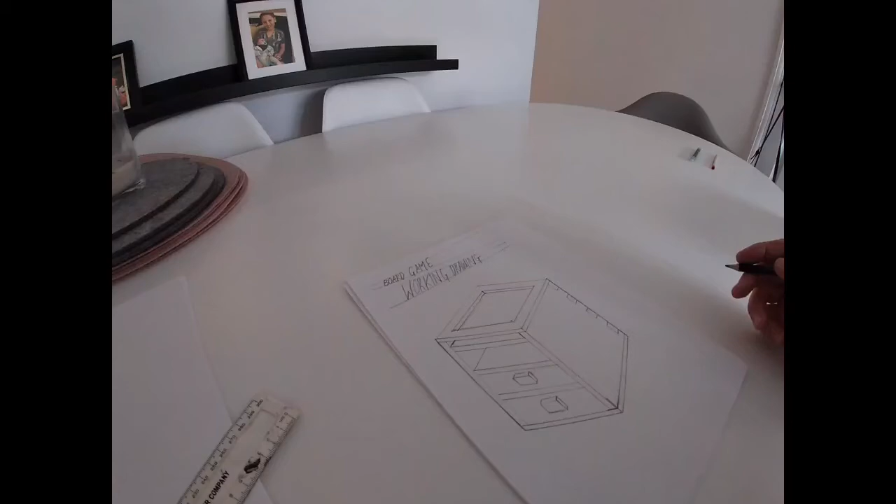We're going back to our board game working drawing. We started off last video by putting in a title, board game working drawing, then we drew out our main box for our board with a couple of drawers down here, and it's got a little slidey in section where the boards will go. So that was our working drawing finished.

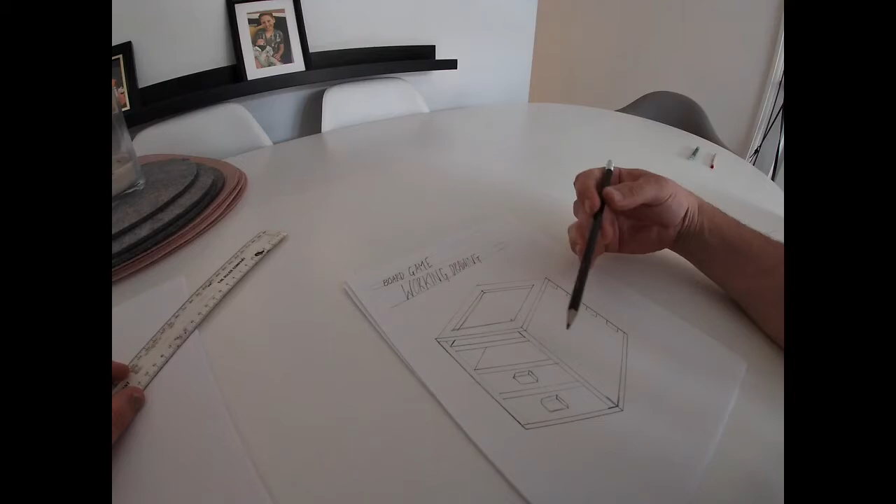What we're doing in this video is we're going to add all the detail you need on a working drawing so that a manufacturer can then go and make your product for you. We'll do this step by step, but it's important that you've watched the first video and completed this task before you can move on. If you haven't done this yet, go back to the first video on the YouTube channel, complete the drawing, and then you can get on with adding detail.

When adding detail, the first thing we do is put our dimensions around the outside of the box, because the manufacturer will need to know what size it is in order to make it. We do this by putting them around the outside, we don't draw on the actual box.

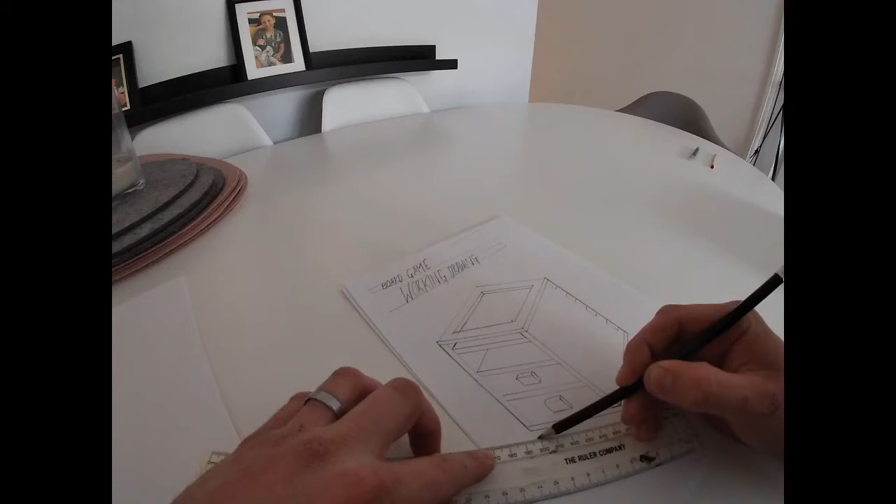So what we can do is start simply by drawing a line along this edge, and I'm going to put a small line here and here coming straight down. That tells me the width of this. What I'm then going to do is draw a line up here, parallel with this edge.

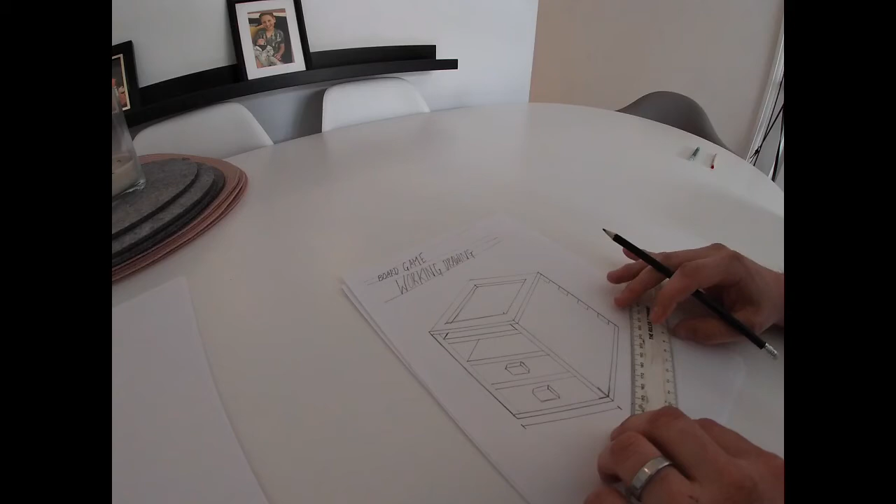Then I'm going to draw a line in like so, put a little line there. My next task is to do the height of the box, so a little line there and a little line there, and parallel with the edge, I draw a line in.

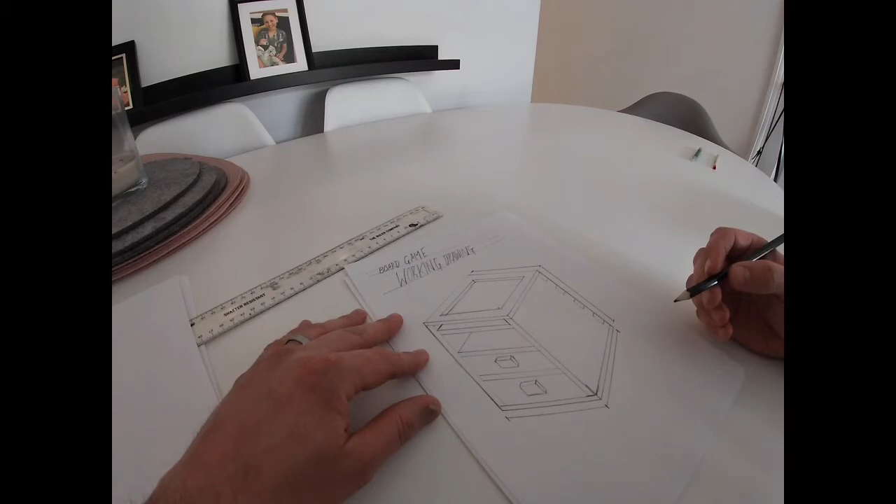And what I'm going to do is, because I want to show the width of this cutout here, I'm just going to put a little line up here and a line in there. Notice that all of my dimensions around the outside are not actually touching the edge of the box, so your dimensions shouldn't touch the drawing itself.

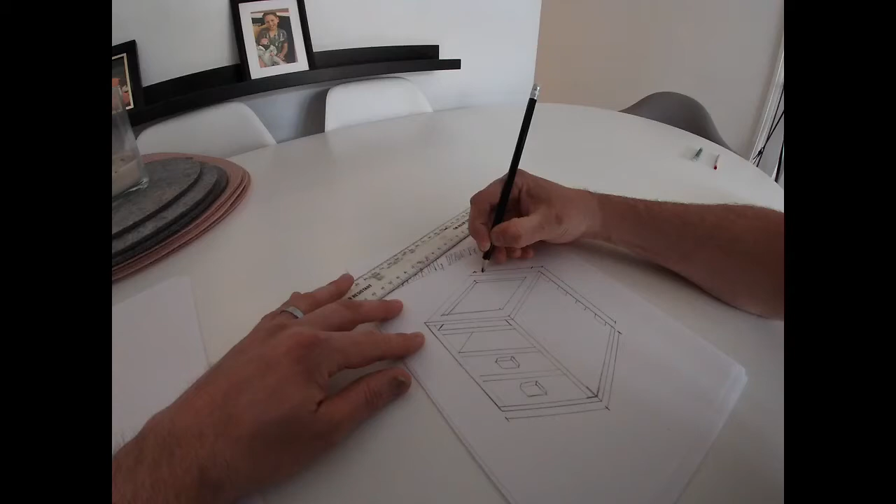I'm going to draw a little line in parallel with this edge, go up here, draw a little line in there like that, and do some little arrowheads in here, and in here, in here, and in here. What I'm also going to do is I want to show the width of the drawer.

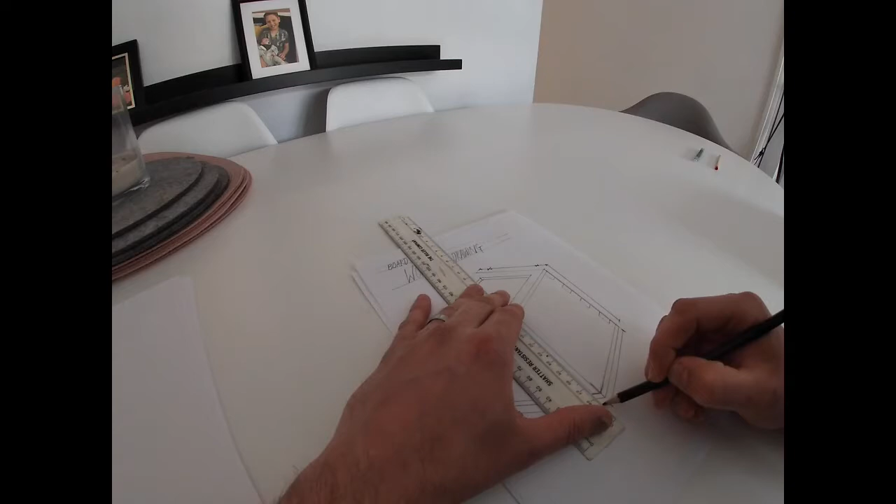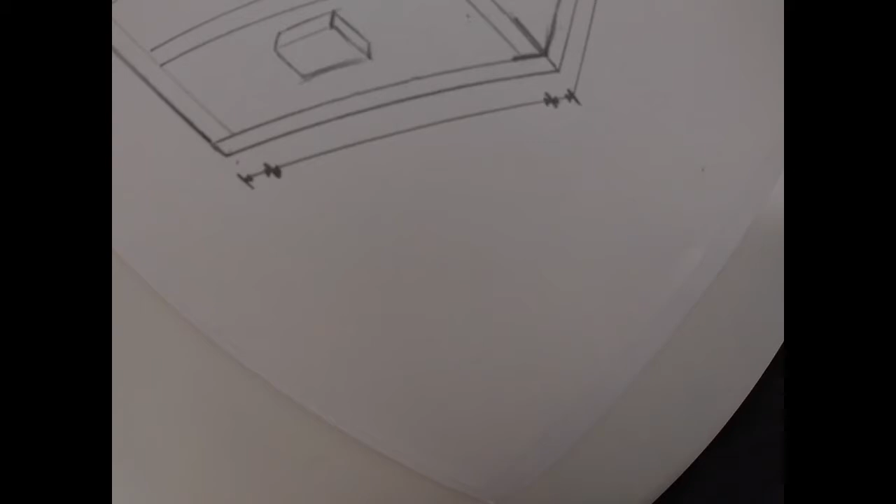So down the bottom here, I'm going to draw a little line like this, and these should also have little arrowheads, in the bottom, like that. Here we go, let me give you a close up. So we should have little arrowheads like this, and up the top here, little arrowheads like this.

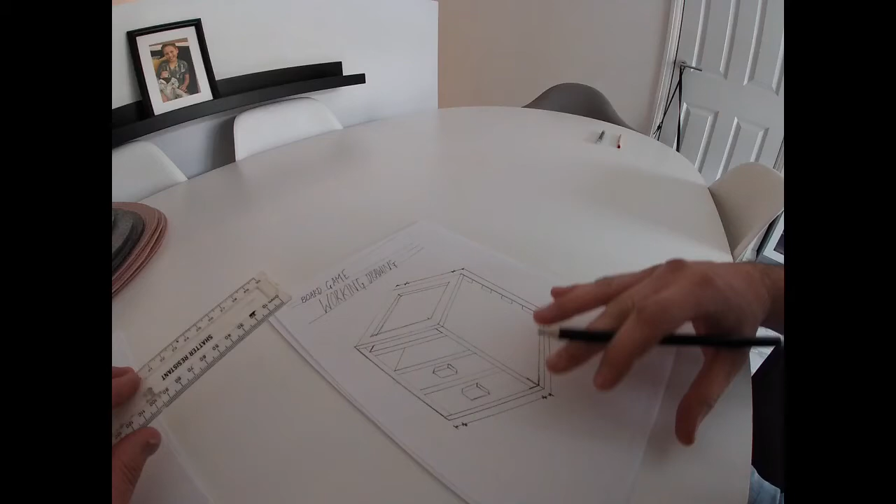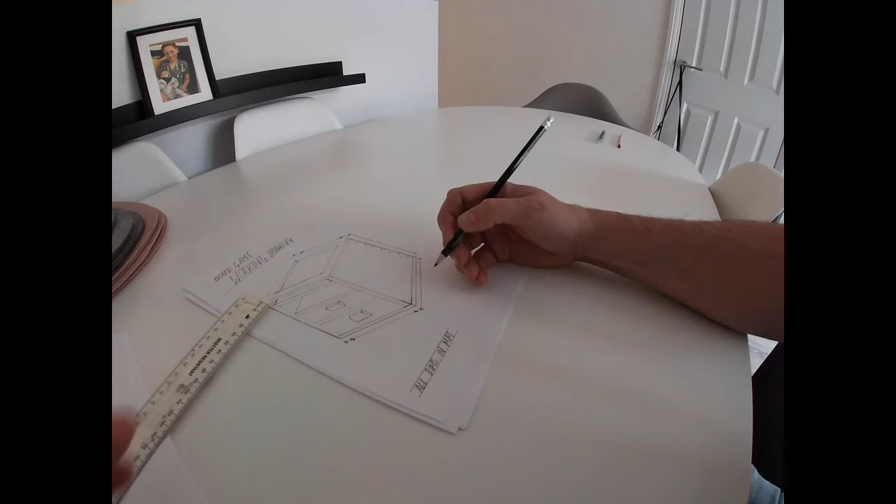Now all of our dimensions, whenever we're dimensioning something, it has to be in millimeters. So on here somewhere I need to tell people that. Down the bottom here, I'm going to put a couple of guidelines, and I'm going to write in capital letters: all dims in millimeters. Give you a little close up of that, how it should look, all dims in millimeters.

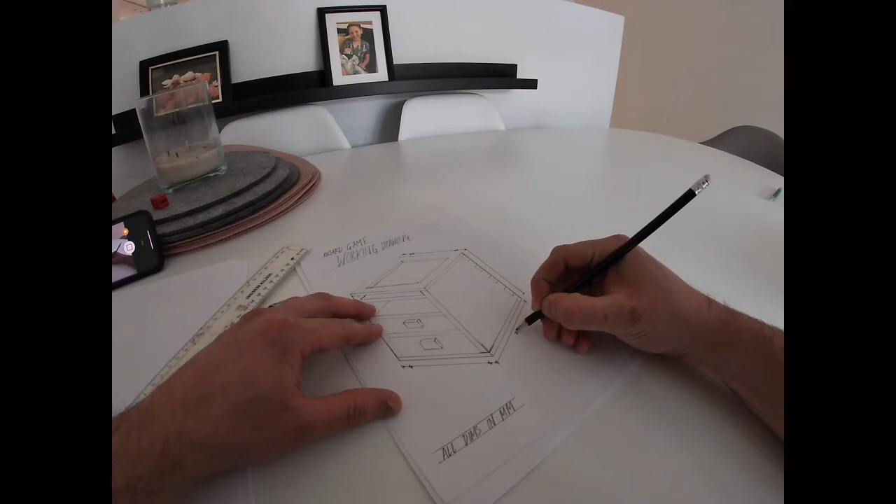Now what I can do, I know all of these are 220 millimeters. However, I'm going to write here on this one, 220, and on this one here, I'm also going to write 220. These are slightly different because I know that this is 20 millimeters and this is 20 millimeters, which we need to take off. So 20 in there, 20 in there. So this will be 180.

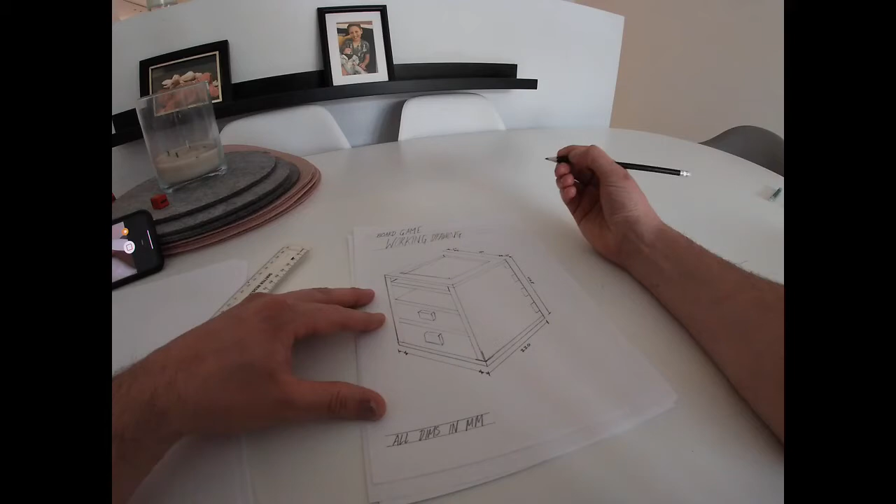And I know each of these at the bottom are 10, 10, and that should be 200. So there we have the dimensions.

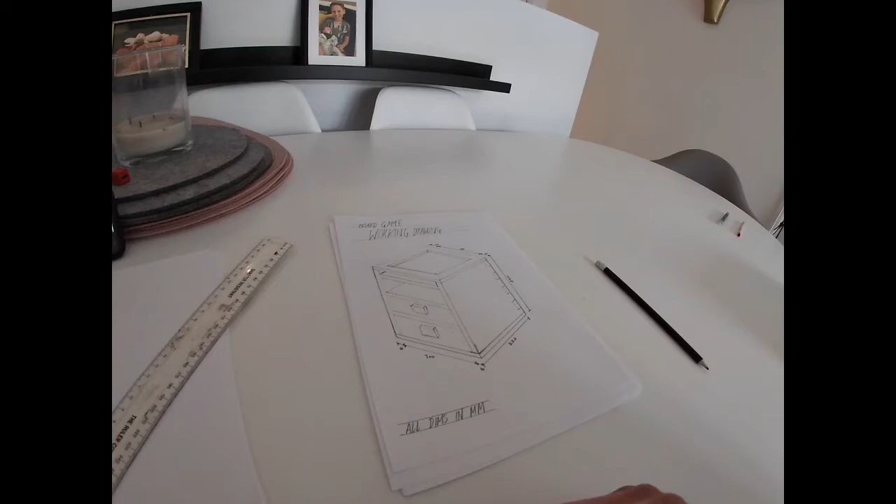There's 220, 220, and then up the top. That for now is my dimensioning done. You could add more dimensions on there, but that's not a problem.

The next thing I want to work on is something called a magnification. A magnification is where you zoom in on a certain part to show how something's constructed in more detail. So what you would do is, I'm going to do one down here.

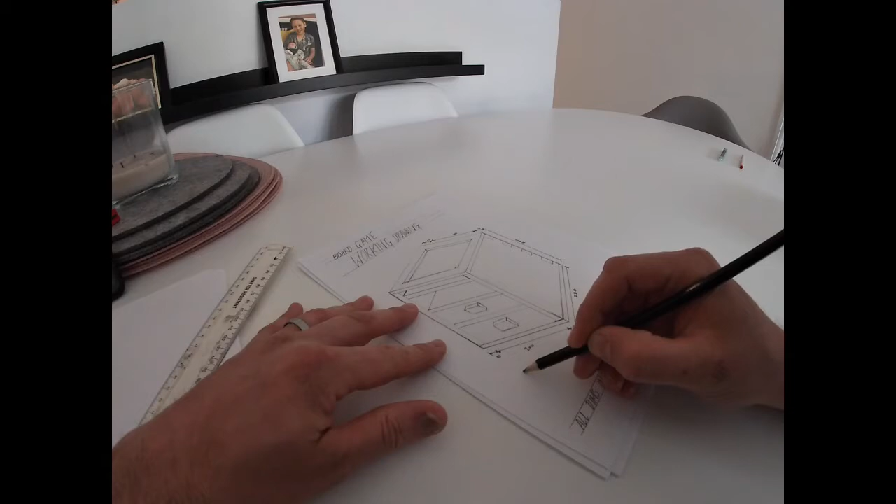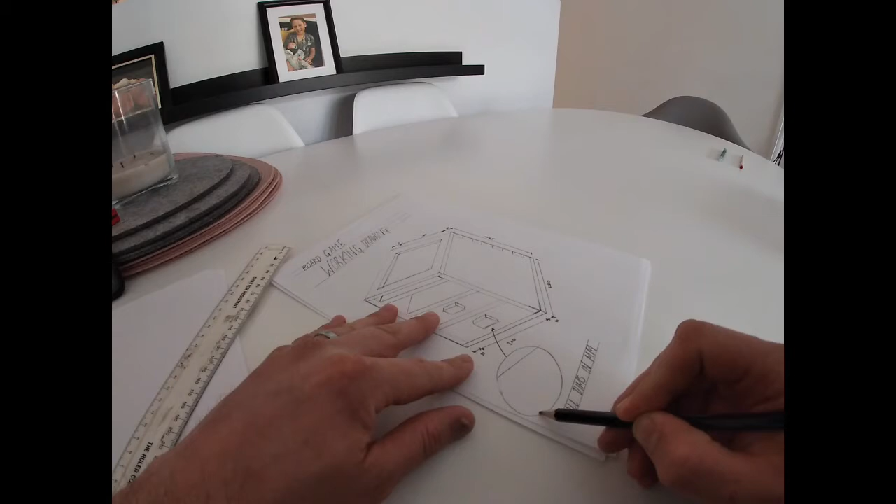Draw a little circle like this, get rid of that bit there. So I've got a bit of a circle, and I'm going to draw an arrow coming from that circle to the handle. All I want to do here is zoom in on that handle and just show the shape of it in a bit more detail.

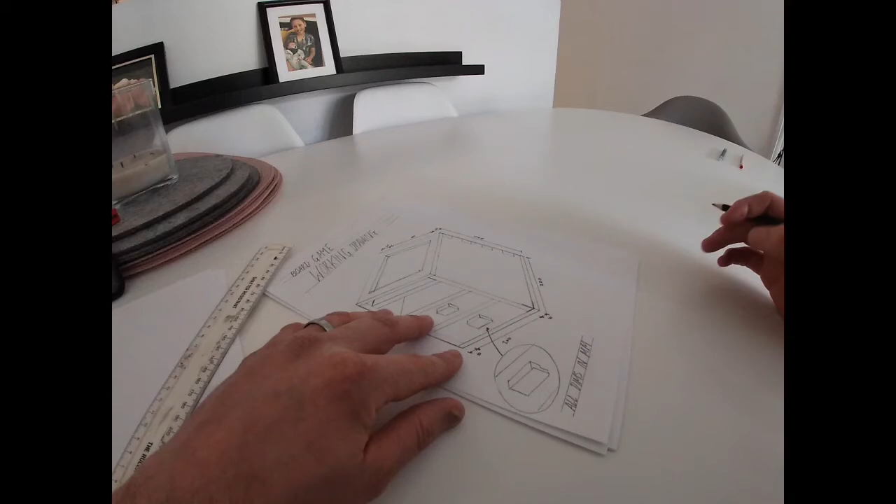Like that. Okay, and then next to it we'll just write in guidelines, handle. Right, let me give you a close up of that again so you can see what the detail is.

The next thing I'm going to show is up here. I'm just going to show the edge of the box zoomed in a bit, like so, and I'm going to draw like so.

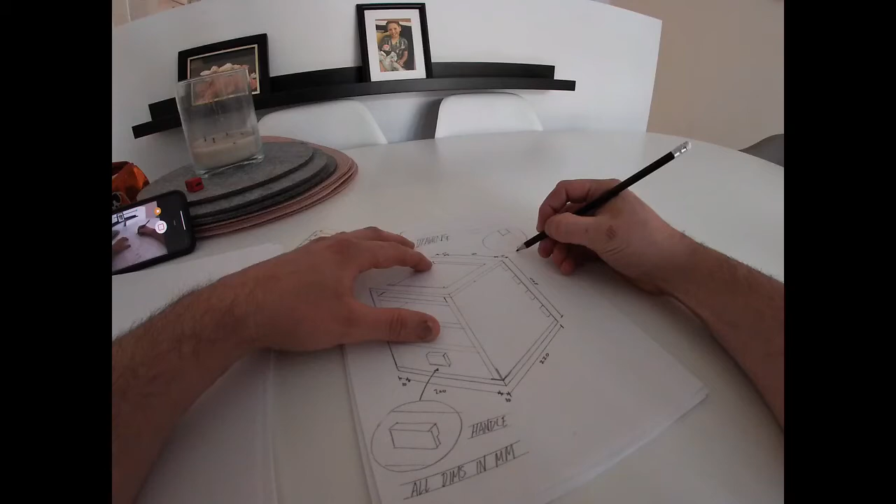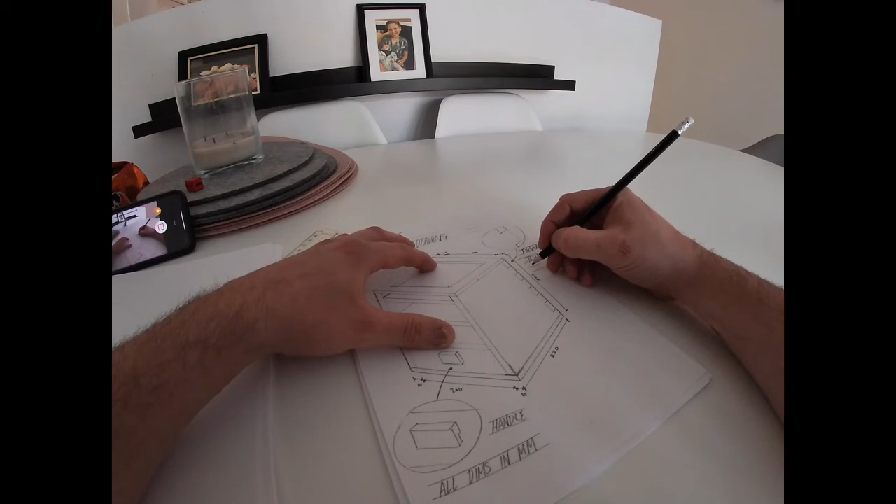Underneath, I'll do a little arrow coming in here, do a few guidelines, and I'm going to write in capital letters: finger joint corners, finger joint corners. There you go.

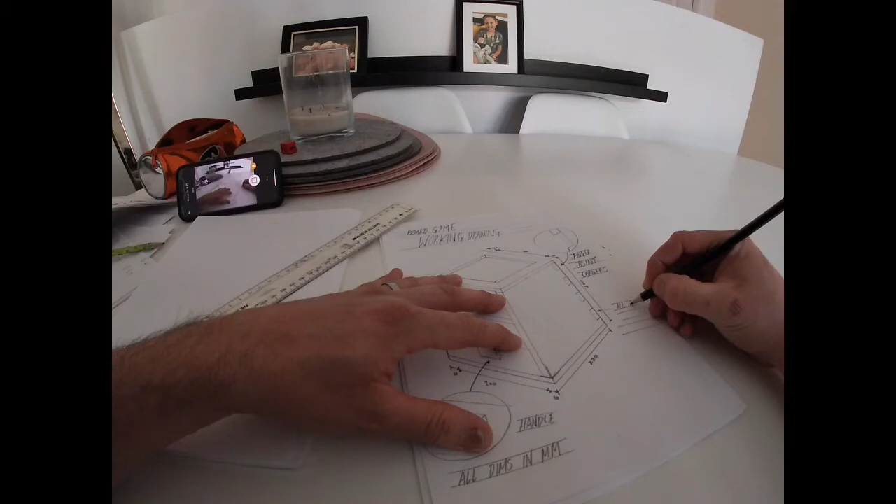The next thing I'm going to write on there is I'm going to do a little arrow coming off, do some guidelines, and we're going to put in there: all sides made with 9mm MDF.

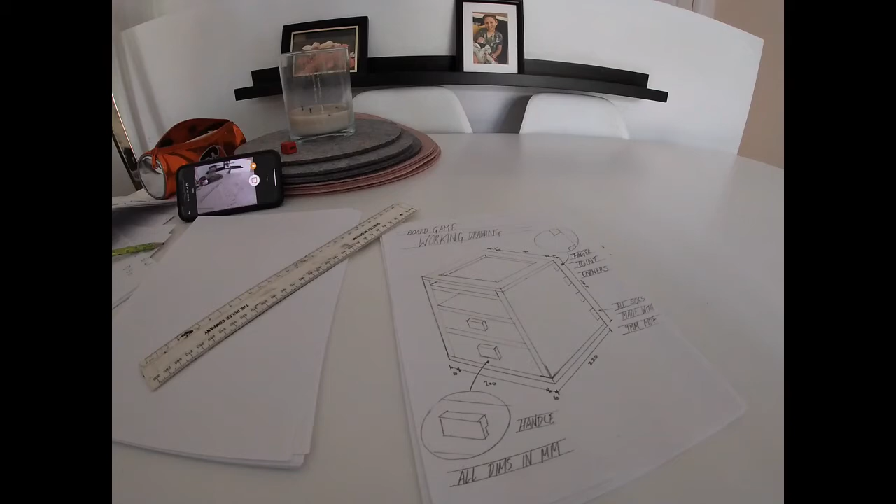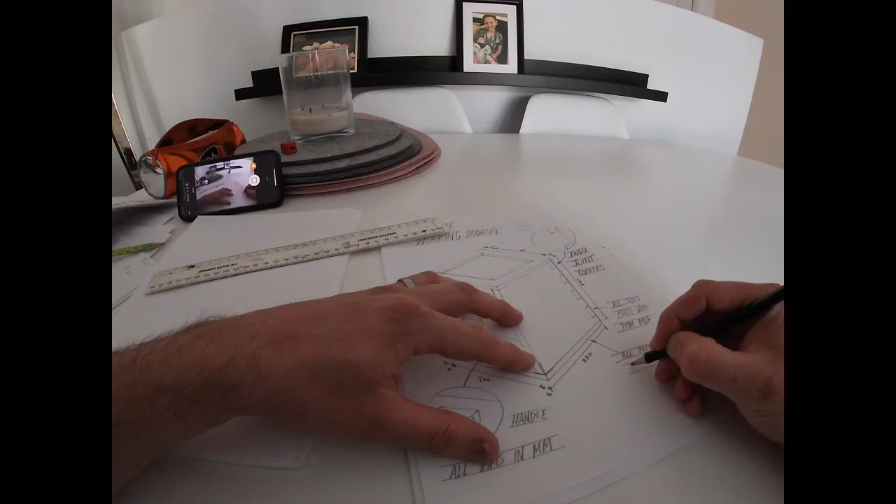That's giving the person a little bit more detail. We can also say down here: all parts joined using PVA glue.

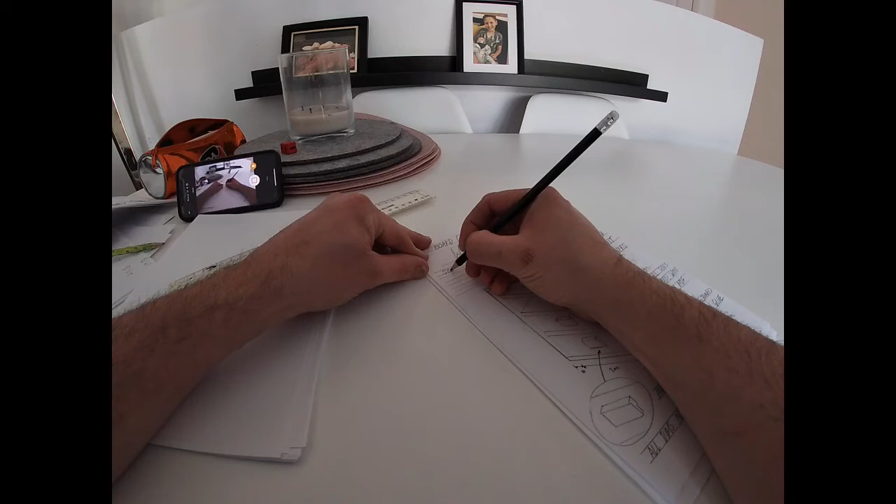I want to label up the top here just to say that this is where the board will be viewed. So again, guidelines. We can write: section cut using a drill and coping saw to view board.

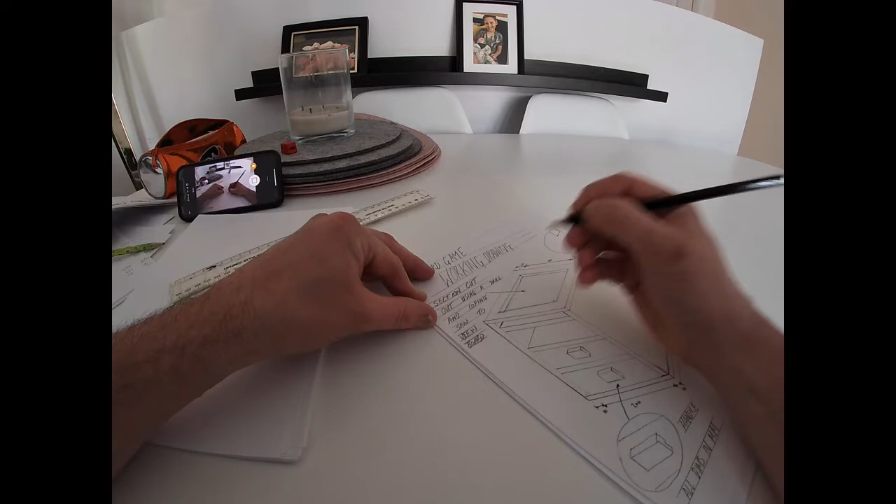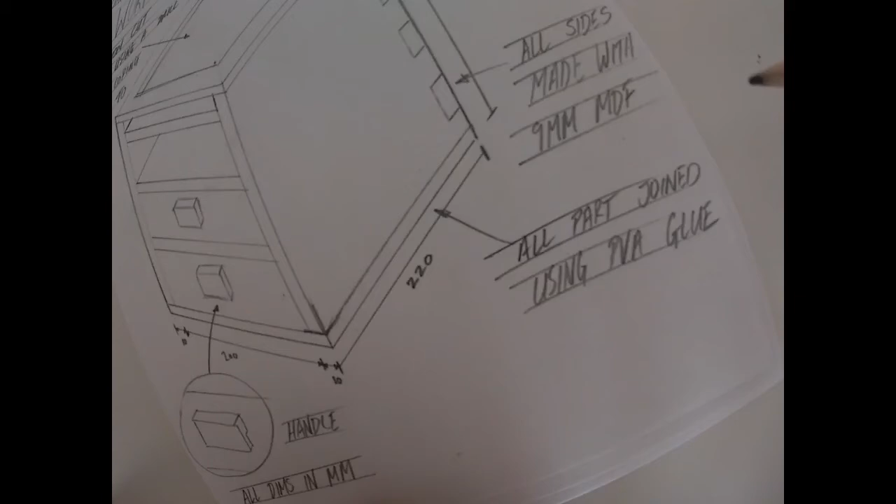Let me give you a little close up of what I've written there. So: section cut out using a drill and coping saw to view board. We've got over here, finger joint construction in corners. All sides made from 9mm MDF. All parts joined using PVA. I've got the S there - parts joined using PVA glue, like so.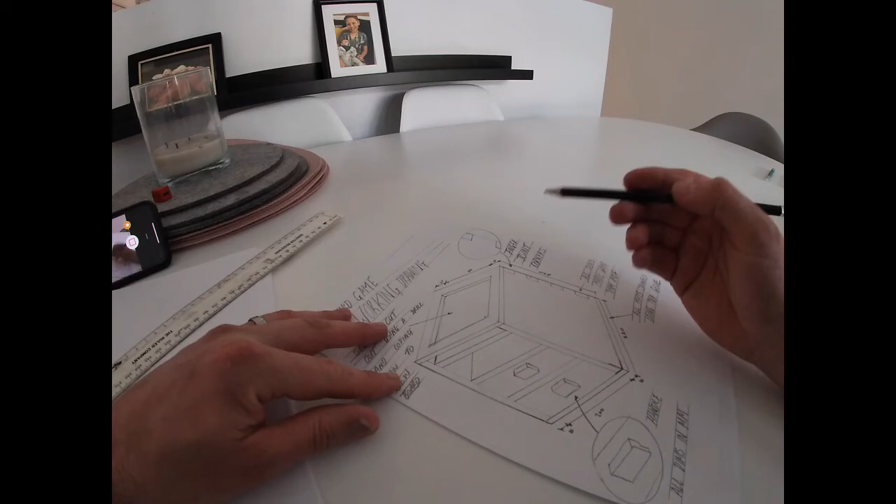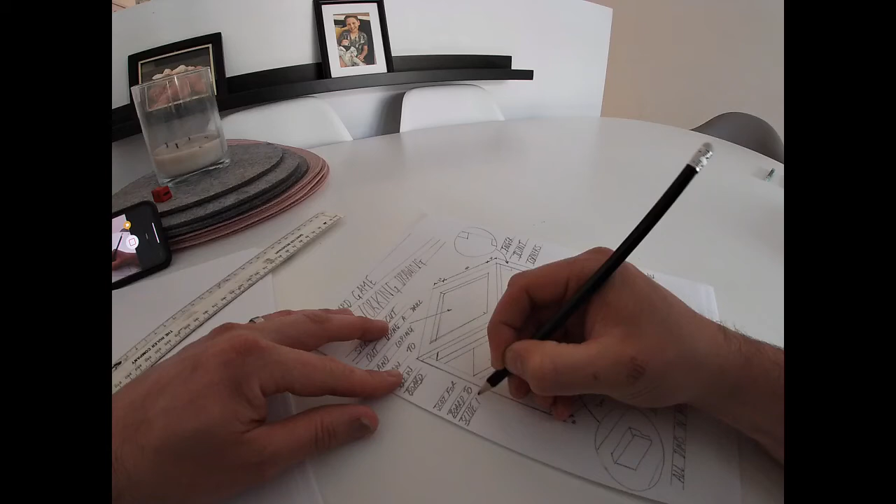The next thing I want to label up is the key features. We've got a slot for the board to slide in, we've got storage for boards. So just under here we can write down: slot for board to slide in. Here we've got 2 drawers, so I'm going to label that up. I'll draw an arrow here first.

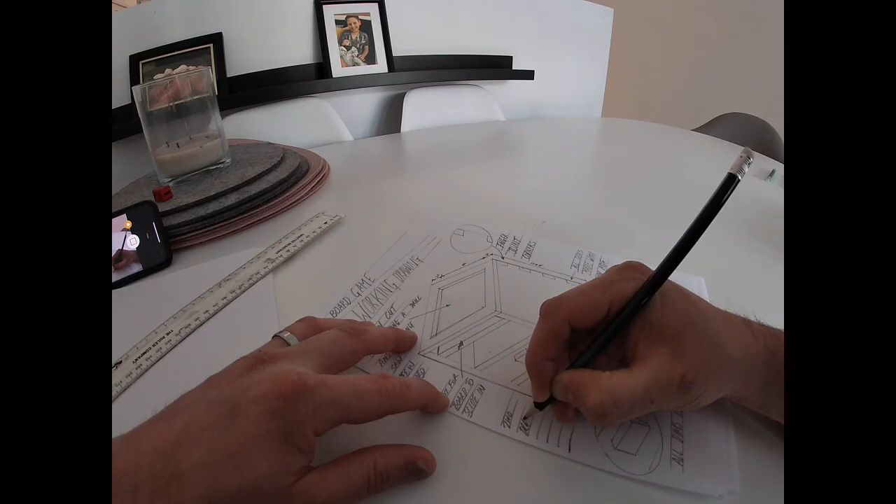There you go. Down here we can put: 2 drawers for storage. There you go, be a close up of that.

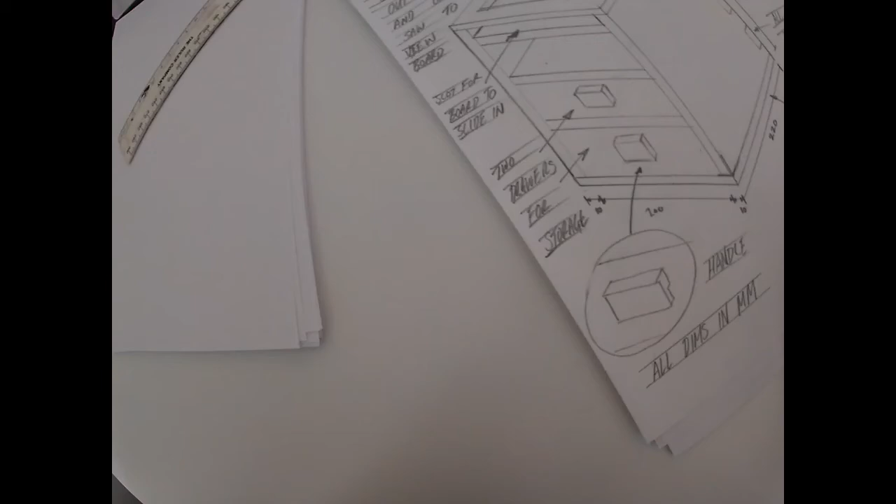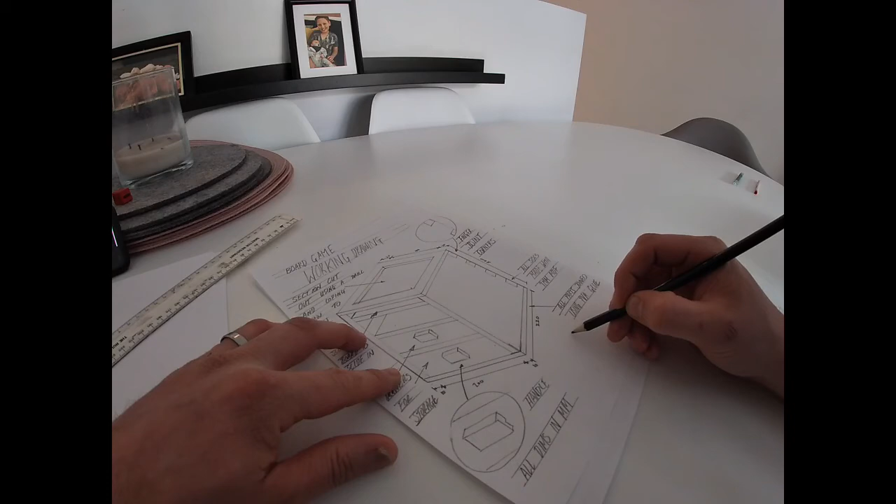What I want to show is underneath here on the base, we're going to dowel joint this. So what I might do is draw a circle, get an arrow coming off underneath, show the base.

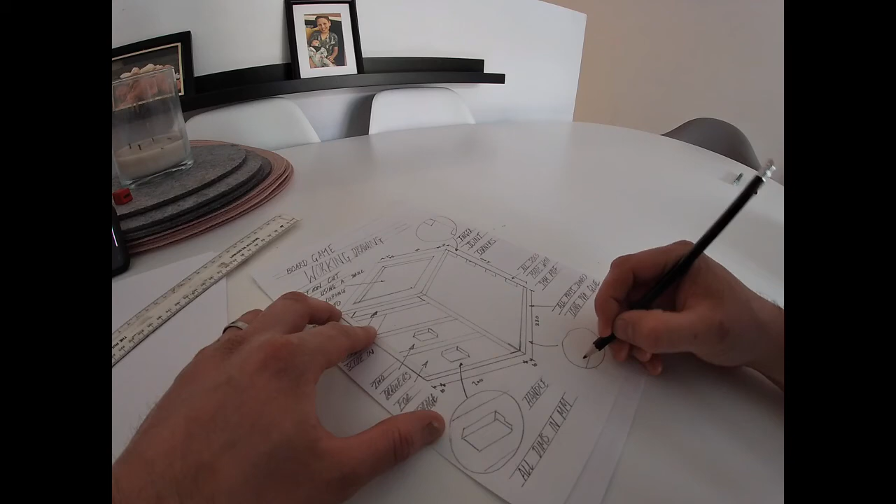And all we need to do is, and then do a little description over here. So we can put: dowel joints in base for strength.

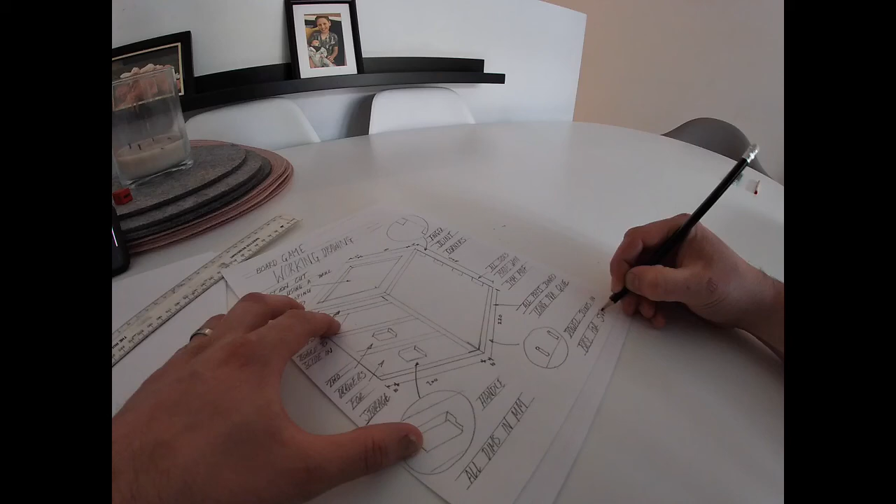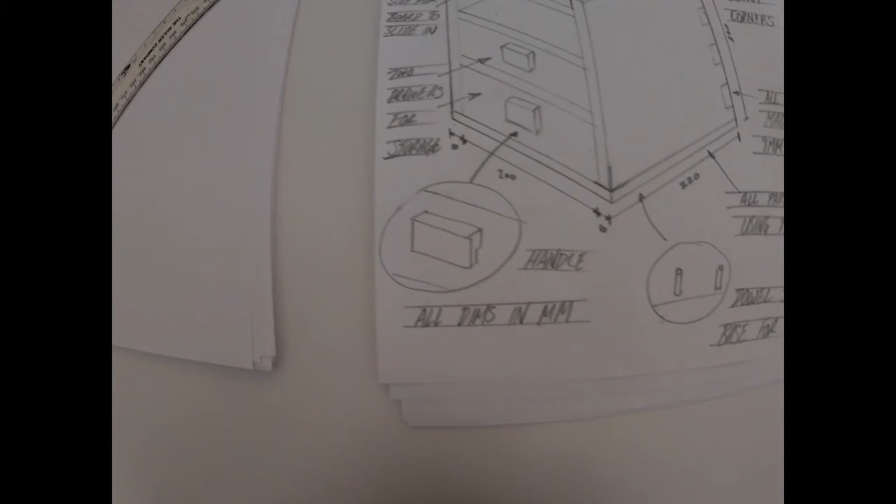Right guys, so your aim today is to get this finished. So get all of this detail - if I give you a close up, all of this detail. We've got the dowel joints down here, so details of construction, details of finger joints, what it's made from, how we're going to glue it together, and so on. All that information needs to be on your working drawing.

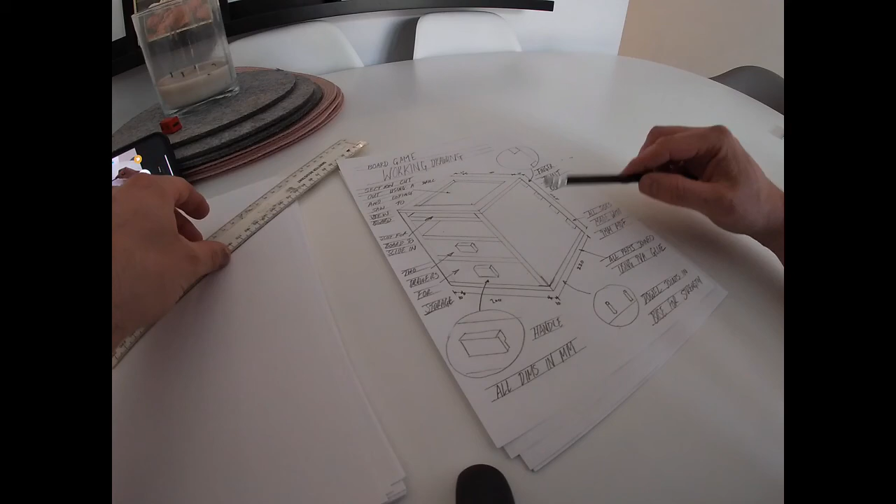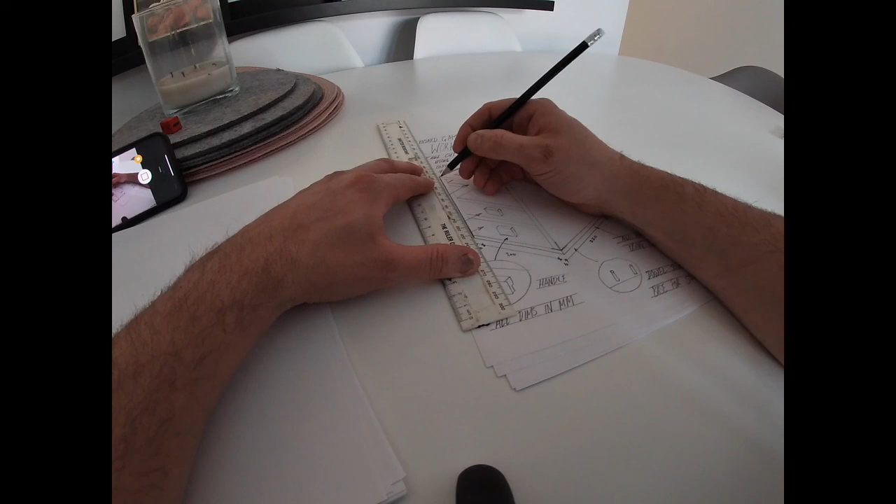The last thing you need to do is we're going to make certain parts stand out off the page. So we want the main drawing to stand out. The last thing you need to do is add a thick bold line like this, purely around the outside. You don't have to thicken up anything else.